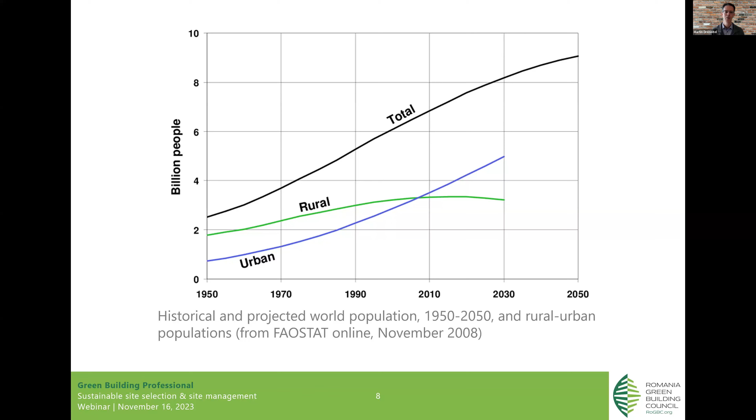Why is this so important for us, for the world? No secret, the number of people on the face of the earth is growing, and it's constantly growing. The rate of growth slowed down a little bit over the last years, or will slow down a little bit more, that's the forecast. So that's why the curve starting with 2030, 2050 starts to flatten a little bit. But what is more important, and this is really the key element, more people will live or are going to live in cities. And the number of people living in the countryside is dramatically going down. That puts a challenge in front of us that we have to deal with. No matter if you're an urban planner, an authority, an engineer, whatever, we have to think how we can address that more and more people are moving into cities. So here some figures: in the 1900s, you had around 2 out of 10 people living in an urban area. We already reached almost 6 people living in an urban area, and it will be even more in the future. So this is what we're facing, and this is why, one of the biggest whys, we have to think about brownfield redevelopment.

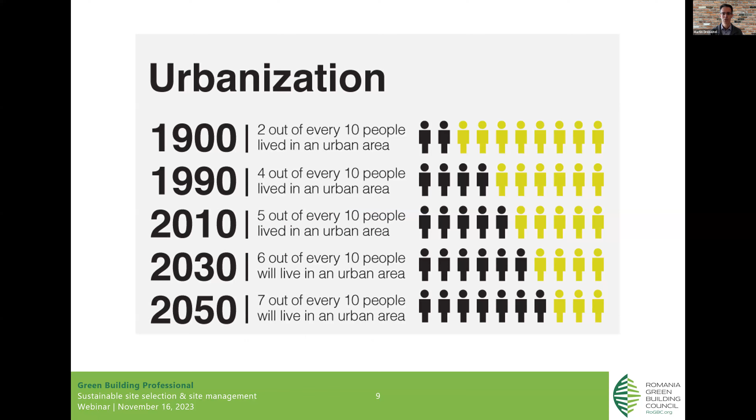I like math, I'm a big fan of figures, so I played a little bit around with figures to visualize what's going on here. Very simple information you can grab from the internet, you can do some research. So the surface of the Earth, biological productive land - I got this figure, the latest figure from 2019. So you see from the whole surface of the Earth, those 510 million square kilometers, around 122 million square kilometers are actually biologically productive. So the world population is already above 8 billion. I did not put here the latest accurate figure, I think 8 billion is sufficient for this calculation.

And then there is one figure which maybe I have to explain a little bit. It's called biocapacity, so that's the surface each of us requires to live. That includes what we need in order to survive - all we need to grow our food, just to live, for housing. This is what we need in order to exist. Every single person requires around 15,800 square meters. And if you compare that to our actual ecological footprint, that is around 27,700 square meters, you see that already right now we're using almost double the surface that is available to us.

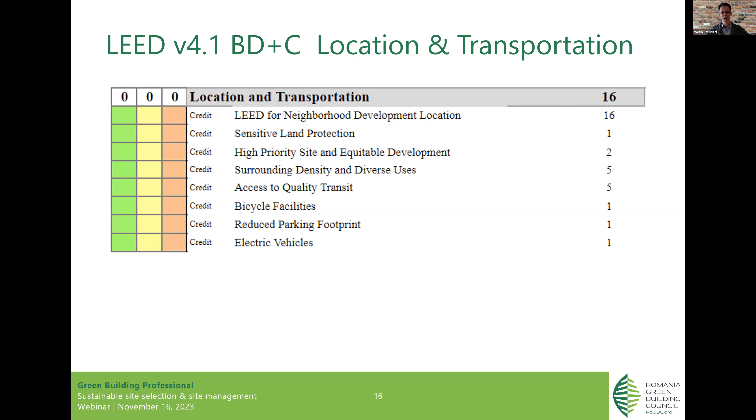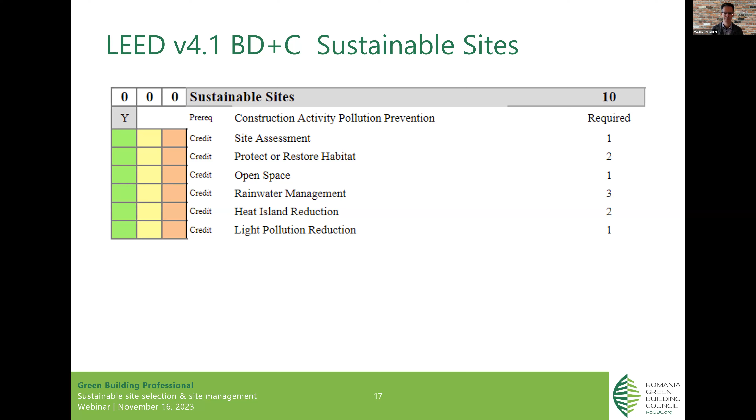Heat island, we will come to that. Light pollution, we will also come to that a little bit later. This one is more related to site management - it tells you how you shall design your project in order to receive those points. It's 10 points, it's a lot.

And we will have a little discussion, and I brought you some practical examples because I think pictures and practical examples explain better than a lot of words.

But what is important for you when you think about your projects is that you have to think about the life cycle of the project, the life cycle of the building. In the past, it was very common: I'm just building it. My focus is on whether it looks nice, and how I want to use it now. It should be an office building, that's it.

But that's not how it works, because when you look at urban development, even areas or whole cities change. They're like a living creature, so they're not the same all the time. An area in a city that might have been office in the past can change into housing. So if you made a building design for office and didn't think about that you might want to change it into housing later on, you have to do a lot of reworking of the whole structure.

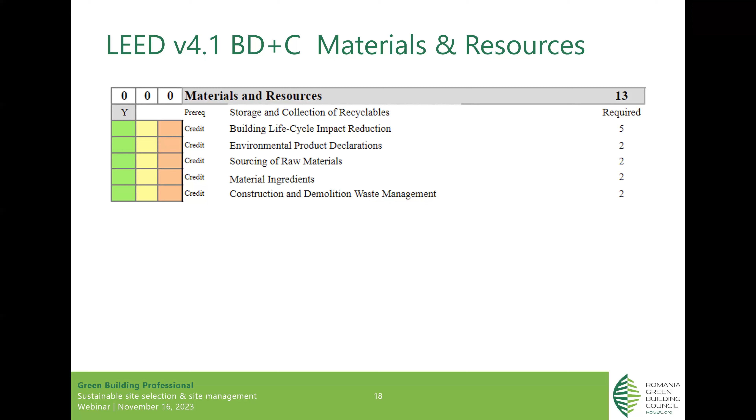So this is a very recent development, and I thought that's maybe interesting for those of you who are into financing projects. Finally, I'm so happy that it happened.

On the EU level, they issued a legislation that promotes a sustainable green approach, not so much from the technical side, but from the financial side. In June 2020, a legislation was issued on the EU level, which is called EU taxonomy. What is it all about? It's about a kind of certificate, really a certificate for green investments, for green projects.

And in order to qualify for such a certification, they introduced 6 targets, 6 objectives. You can read them: one is called climate change mitigation, the second is climate change adaptation, the third is sustainable use and protection of water and marine resources. Then transition to a circular economy, pollution prevention and control, and sixth, protection and restoration of biodiversity and ecosystems.

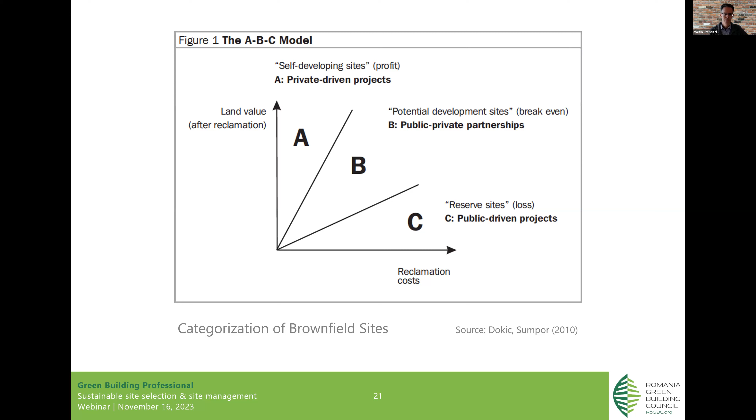Okay. Working. It's this one here.

Good. Now the two final slides on these chapters. Maybe at this point of the course you're asking yourself, yeah, okay, that sounds nice so far, why are not more people doing it? The next two slides are answering this question.

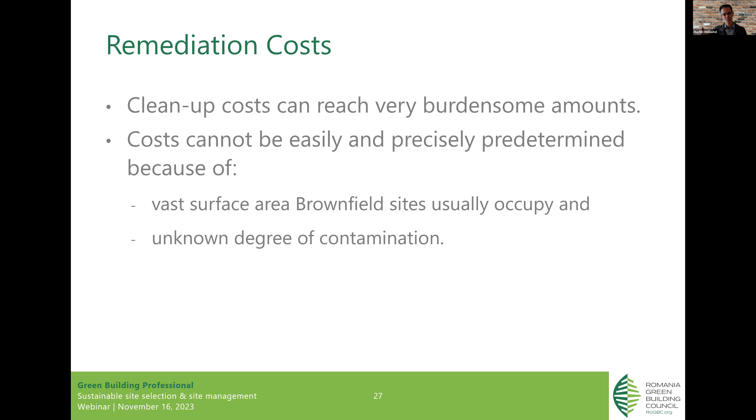The second important information for you is, remediation is not something that is only relevant for the land you are using for your project. It has an impact on the neighboring plots as well. In most of the cases I worked on in my career, if there is contamination on one piece of land, there is usually also contamination on the neighboring plots. And you are responsible also for this piece, because if this is your land and the contamination came from your land, it's not the neighbor's problem, it's your problem. So you also have to understand, where did it start and where did it go?

Maybe it started there and came to you. That's the best thing that can happen to you, because then your neighbor is the responsible one. So we need to understand where did it start, where did it go, how big it is, how deep it is. Then we can decide how we treat it and how we move forward.

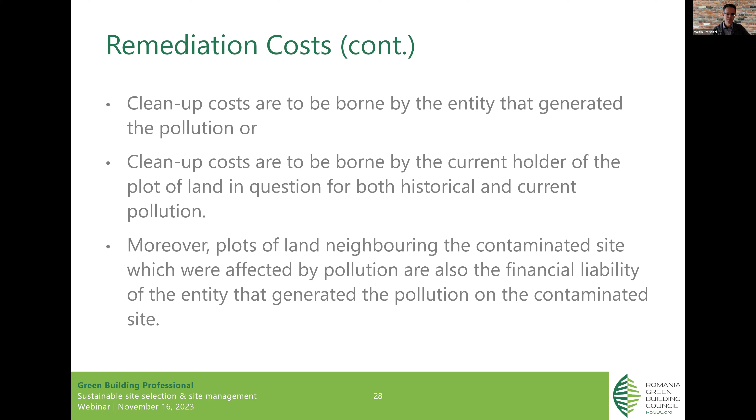We already had that piece. As an authority, as a government, you have to really think, how can you make it attractive for people to do brownfield development? You have to give them something, and then you get something back. What do you get back? If you have, let's assume, a contaminated site in the middle of the city, an old factory, already closed, bankrupt, nobody wants to use it because there are so many problems. I don't want to touch that piece of land.

For you as a city, this is an unutilized land. It might have a health impact on the city, on the people living around the area. You're not receiving taxes on that piece of land because it's not used. So there is a lot of incentive for the city, for the authorities, to promote the treatment and reuse of the land. If this land is brought back to life, you have again profit, tax on profit, profit taxes on salaries if people are working there. You increase the land value of this piece of land and of the surrounding land. You bring back business to the location. So there are a lot of benefits that at first glance are maybe not visible.

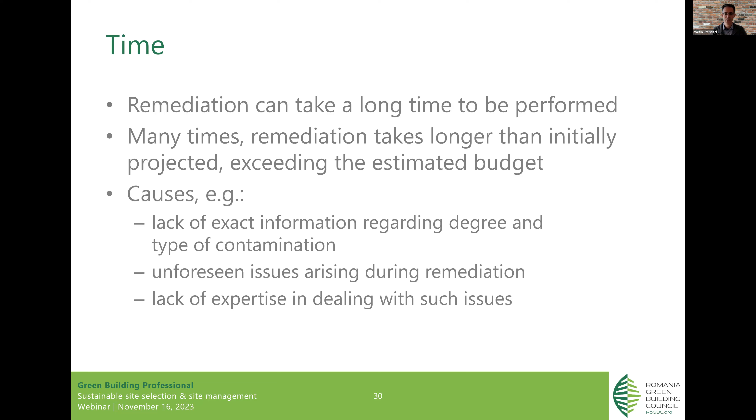Remediation can take long, and it requires proper experts in order to take the right decision for you. I want to skip that here a little bit faster because we will come to that again. And what can, for example, the authorities do to speed up the process?

There is something that has been introduced in the United States, which is called fast-track permitting. No offense, please don't take it personally against Romania or any other Eastern European country. I worked a lot in that region, and what I learned is the processes are pretty time-consuming and bureaucratic, and it takes a long time until you get a permit for a project.

Many of those steps are, I wouldn't say unnecessary, but repeating and take longer than needed. So if you as an authority want to help a project owner, help him. If he's working on a brownfield, say, okay, if you do brownfield, I'm helping you. I'm giving you the most efficient permitting process possible. I will help you as much as possible. I will prioritize your project in order to implement it faster and improve the situation faster.

So there are ways authorities can help. And there is also an interesting project where I participated, between Germany and Romania. The Romanian authorities did not have enough experience on remediation, so they invited German government or authority representatives to come to Romania and teach them and train them how they are doing things back home. And that really helped them to understand, okay, now it makes sense, I can do that. So that was a cool project.

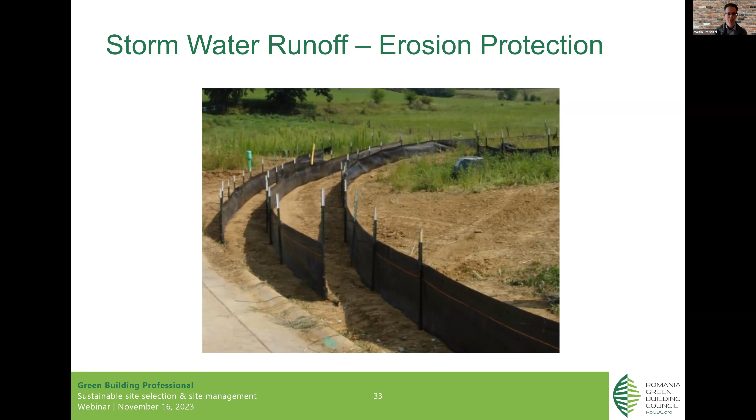And a little advice from many years of practice: do a baseline assessment. Check how the situation looks like before, do some measurements, do some monitoring, and continue the monitoring throughout the project until the end, so that you have really proof that it was not you who caused certain problems. A very classical example is that people come and say, because of the vibration, I have a crack in my house, or some glasses fell off the shelf, and you have to pay for it. No, it was not me. It was there before, and learn how to hold the glass. So you have to keep that aspect in mind. Baseline assessment, monitoring, and then you usually don't have problems during execution.

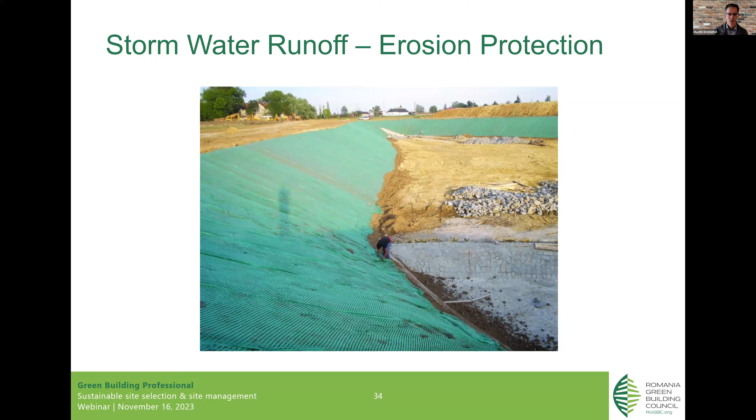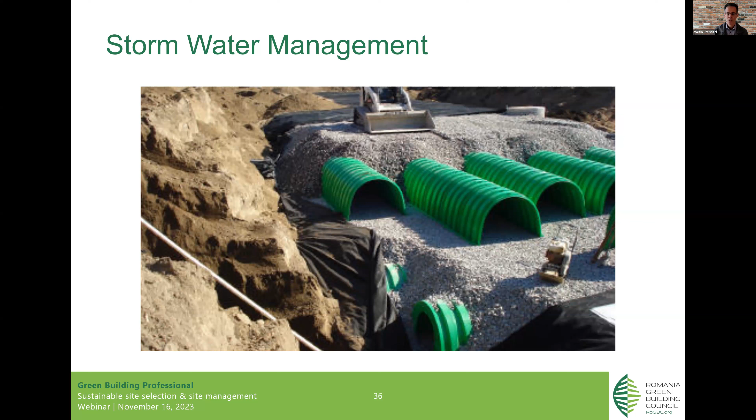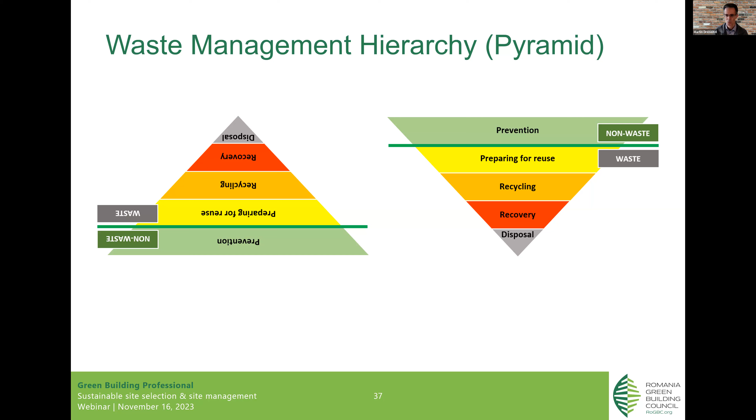Please discuss this with somebody experienced, because you will be surprised how much you can prevent and how much you can reuse on site before you go down into the orange, red, or gray area. But be patient for a second—once I show you the practical examples, this will make even more sense to you.

Another element that you saw in the certifications from LEED and BREEAM is alternative transportation. This is, again, why brownfield projects in urban areas are so interesting to us. Usually inside the city, you have a developed public transport system—there are buses, maybe trams, maybe a subway. You can use the bicycle more easily than if the factory where you're working is outside the city and you have to go on the highway, where it's maybe not a good idea to take the bicycle.

Inside the city, it's a lot easier to use electrical cars. You can provide charging stations. So those are all elements, although they don't have anything to do with the building.

That's why I'm saying you need to always see the big picture. It has to do with your project, it has to do with the community, it has to do with the city. A sustainable project is not an isolated construction of a building. It's a project that involves all stakeholders, and we have to go bigger.

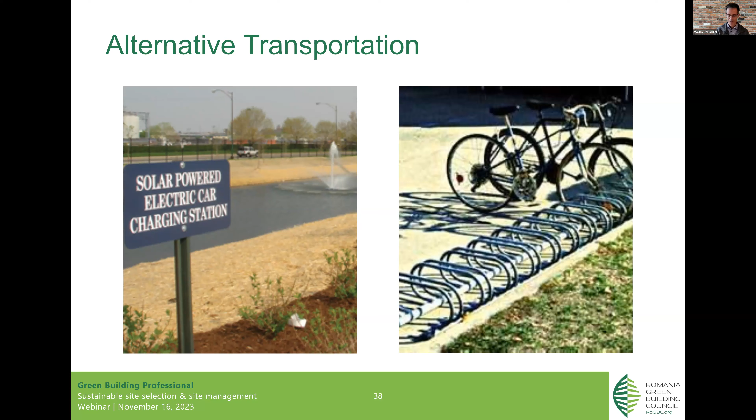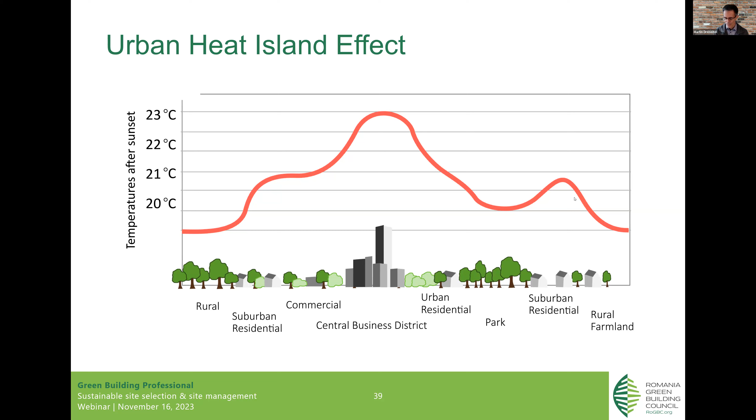Our job as project developers, architects, designers is to reduce the heat island effect. We have to take measures in our sustainable design that help reduce this phenomenon. How can we do that? We already had some cases: plant trees, put water surfaces, avoid asphalt, use concrete over asphalt, put green roofs, put green facades. All measures that reduce the temperature are welcome to fight the heat island effect.

Another element in certification in site management is light pollution. Whenever you can reduce it, do it, because it makes people feel good. Go on top of a mountain or in a very remote area, lay on the ground and look at the skies, and really enjoy that you can see the stars and the sky. Because you can't do that in a city, there is too much light pollution. You don't see the skies anymore, there's no stars visible.

More and more companies implemented, especially once energy prices increased, started to completely turn off lights in the buildings and even turn off their advertisements. So far nobody cared, and then everybody said, marketing, nice illumination of the building. So what? This costs so much money using the electricity, and it has such a negative impact on the surrounding people. You can't sleep anymore.

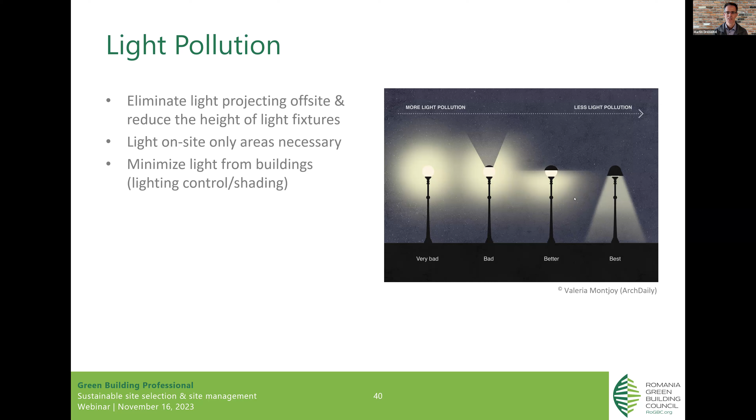And now we go into some practical projects. And here we have solutions - those are real projects that have been implemented. Those projects are all from the United States. Why? Because I had a partner, a company that partnered with us. The company was called Epstein. It's an architectural company from the United States.

They were active in Romania, and they helped us and the Romanian Green Building Council to develop the course. And when we developed the course, they contributed with some cool information and materials, and I kept them because it is hard to find so detailed information on European projects. So that's why, and it shows exactly what we are discussing about - that's why we have American examples.

So let's start with the first one. The project name is not so important. Where are we in the United States? We are in the Chicago area, and the site is around 5.4 hectares. Later on, they created a lot of jobs over there. They put a new facility, a commercial laundry later on.

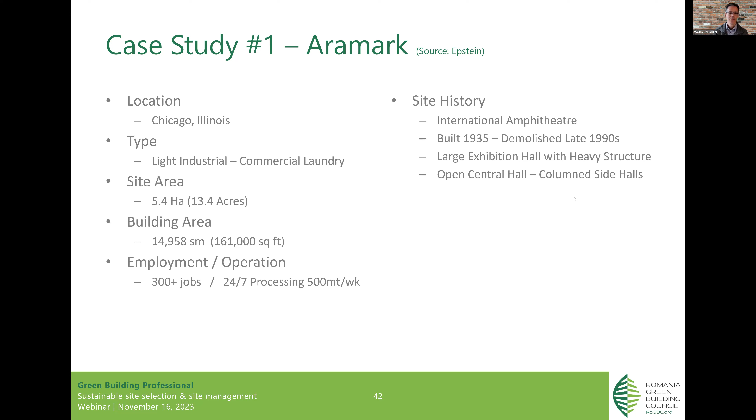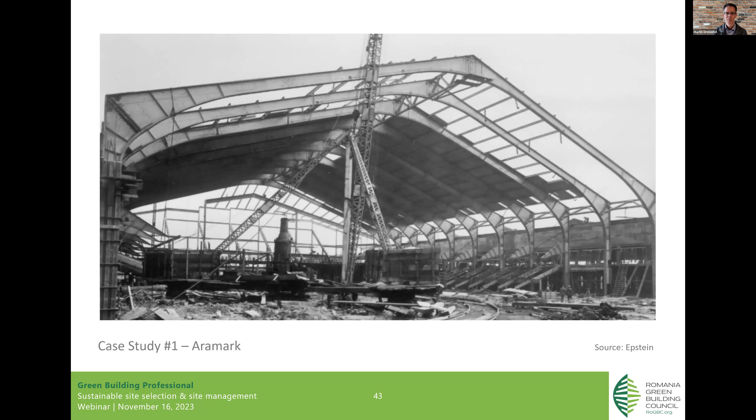And then those are those massive foundations that you had, under each of those metal elements, those beams. So we had the foundation.

So if we go now - let's think sustainable site development. Unfortunately, we can't have here a very lively discussion. I give you the story without asking you what would you do. I give you the classical story, and I give you the sustainable story.

The classical story is that, of course, everybody would have taken down - or this is taken down. The concrete here is removed. The foundations are excavated and removed. So that's the classical approach, meaning we eliminate all the problems that we have on site.

What is the result? We have a lot of excavation. We have a lot of transportation. We're moving the material to other locations. Okay, maybe some of the materials can be recycled, can be reused somewhere else, but also there is a lot that goes into a landfill. So overall, increased transport, increased crushing, increased landfilling - definitely not sustainable.

Now we come to the clever approach, and here it's about working together.

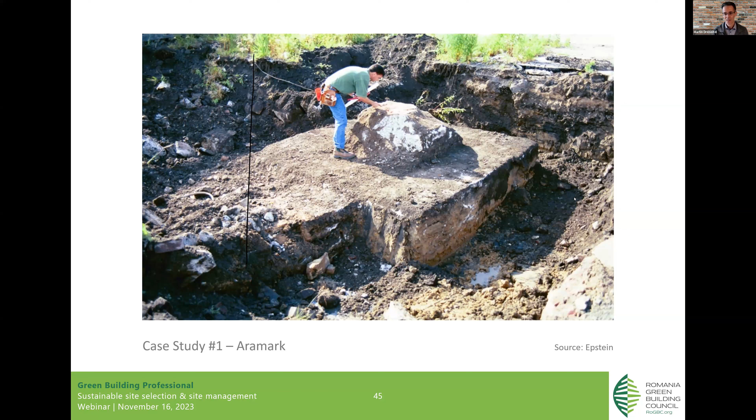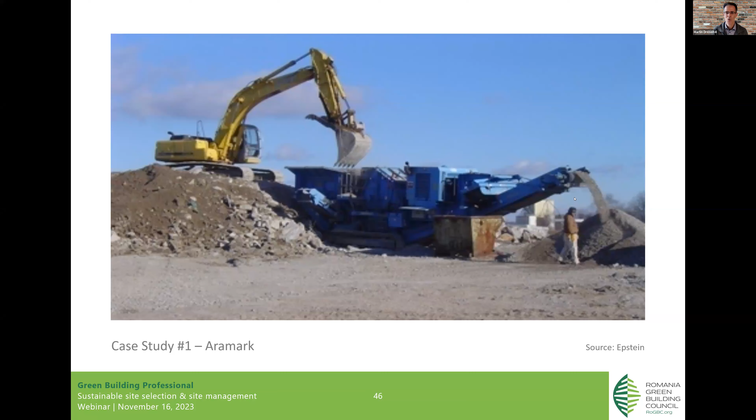So what they did finally, there was a lot of crushing involved from the paved area, but the material was not transported away. It stayed on site and became the base layer of the parking. And then on the freed parking area, they built the new facility. That's the whole secret of this project.

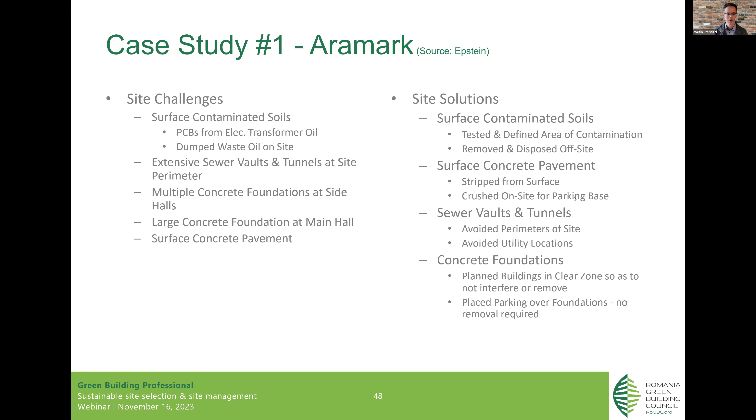The next example is, again, United States, but we're not in the north, we're not in the south, we're in the Missouri area, so the state of Missouri. The city is called St. Joseph, maybe that rings a bell in which direction we are going here. The state of Missouri has the name from the river Missouri.

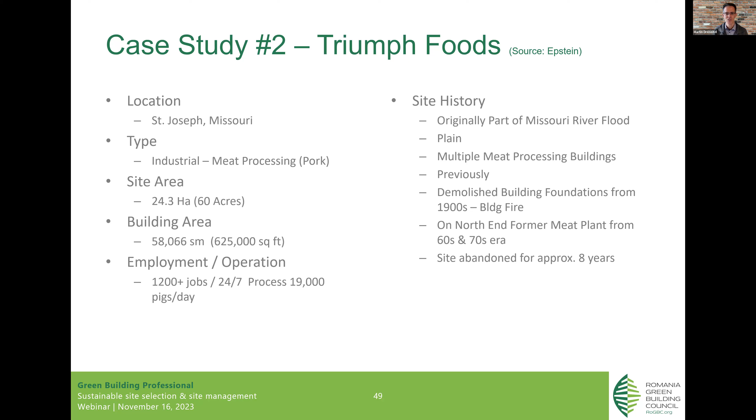The river Missouri is like most rivers that are naturally flowing. They have floods, and the material from the riverbed is distributed over the area as sediments, and you have a very high groundwater level, and the fine sediments are not very ideal for construction. So this is the history of the site. There is a picture that shows a little bit of the footprint of the site.

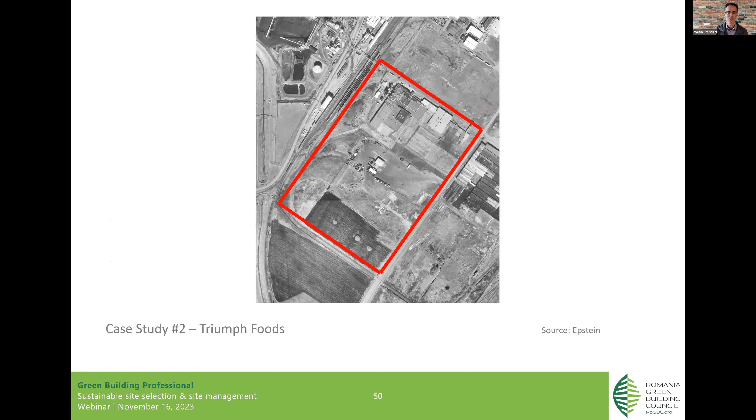So any structural engineer would say, well, high groundwater, fine, it's kind of clay material, the plasticity is very high. It's not very stable, it's kind of difficult to build on.

And in many projects, a decision would have been made. Let's take the example, not sustainable: we'll say okay, we cannot use the site, high groundwater, the soil is bad, let's go somewhere else and build somewhere else.

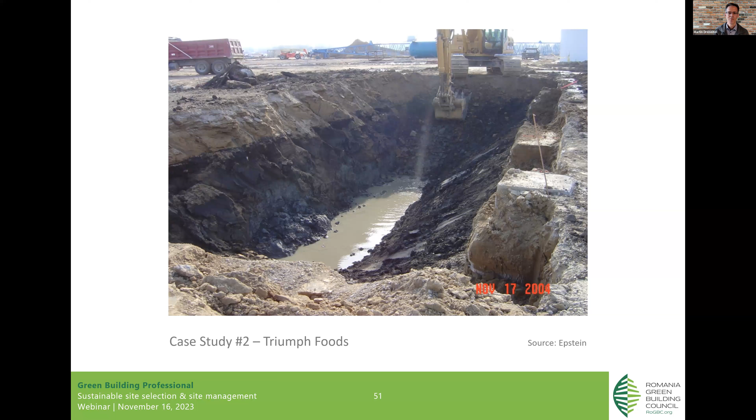And then you see some foundations here on site, on the side here, so there's a lot of foundations also. And yeah, what is the solution? Let's start with the foundations. Again, discussion between architect, environmental engineer, structural engineer, project owner.

The foundations on site, well, we don't have a problem with that. We are not building a basement, we are building a facility on surface, so we don't need to go deep into the ground. So we started using the foundations, and where necessary, we cut the foundations to go through with pipes. The rest of the foundations remained in place. So that was the solution for the foundation.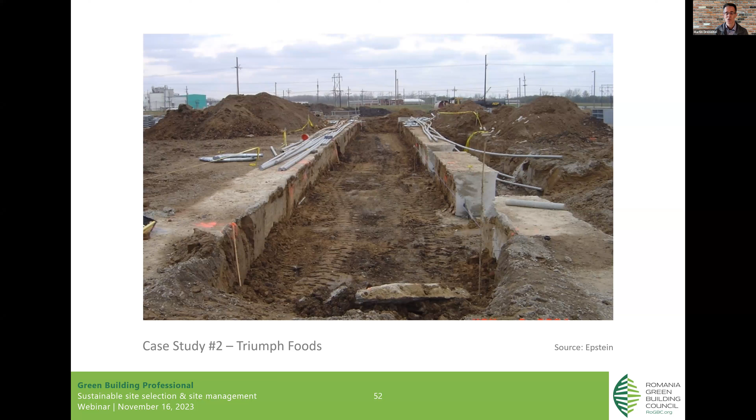Not generate - we are again at the waste pyramid. Remember, we are on top, not generating waste, avoiding waste. That's the highest priority: reducing transportation, reducing disposal, reducing emissions from transportation, reducing dust, reducing noise. These are all sustainable elements that will give you points for certifications, but we're not doing this for points only, but really to have a positive impact on the environment, because we are not putting the material into a landfill.

But coming back to the soil - this is a little bit difficult maybe to describe, but we will manage it together. What you see here, I hope it's big enough on your screen, looks like a grid. It is a grid, it's so-called a geogrid, and it's made out of polypropylene. So what you have here - sorry if I use my hands - you have two layers of polypropylene fibers that are welded together so that it ends up in a grid.

It's really, really strong. And what they did then is put the layers like in a hamburger - several layers: a layer of soil, a grid, another layer of soil, a grid, another layer of soil, a grid. And what you see here is, ultimately, like you use steel for reinforcement in concrete, you use this grid as reinforcement in soil.

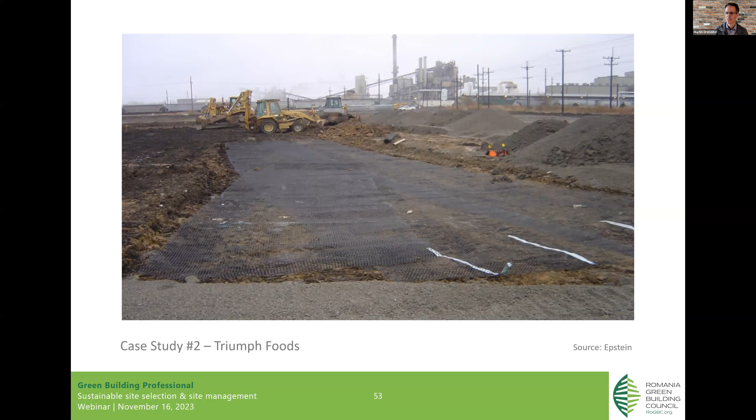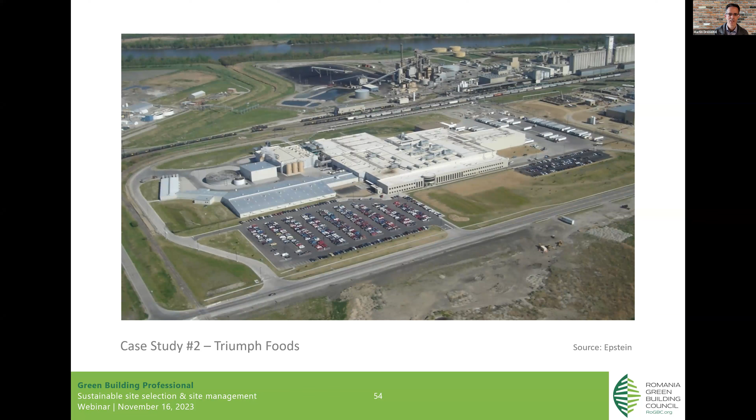And finally, this is how it looked like at the end. In the back, you see the Missouri River. So finally, they managed to implement this project in a sustainable way using this old site. Here we had some crushing, some reusing - the foundations remained in place. This is something you will face in many different areas and projects.

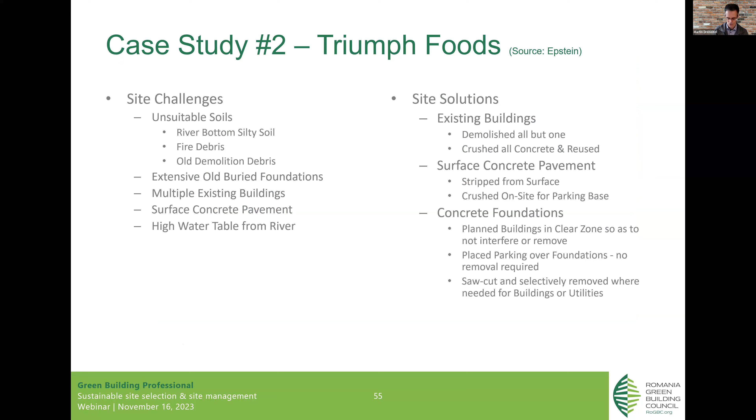So next one, we are back to Chicago. The reason why, again, Chicago - Epstein has their headquarters in Chicago, that's why we have so many projects from Chicago. This is an interesting project because they got a LEED Platinum certification, the highest certification you can get under LEED. Here it's important to mention there was some incentive from the city for redevelopment, and also a shorter permitting process because it was a LEED project.

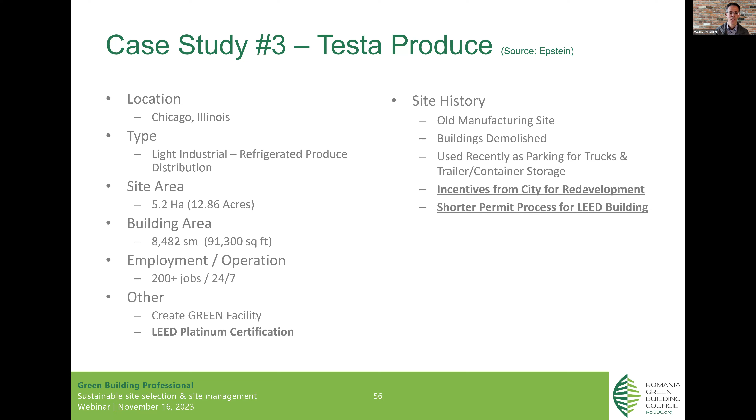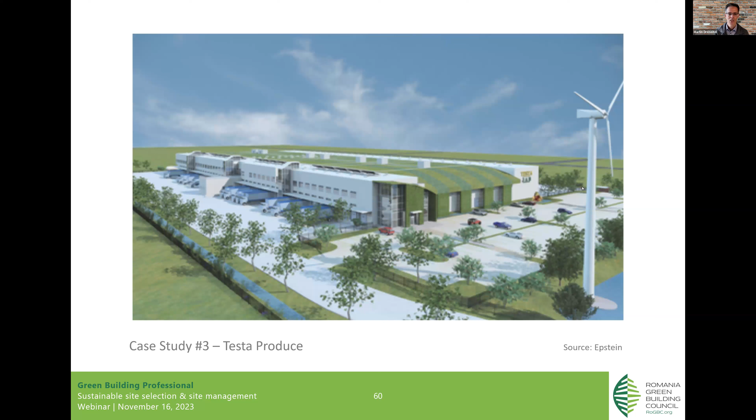And this is now the real world. So they put the wind turbine over there. They built the green roof. They built the solar panels. They had electrical charging. So there is many things you can do.

And the contamination solution, I can't show you on the picture, but I will show you later when we come to the remediation part, what they did over there. I can tell you what they did. They had a contamination on site, and the contamination stayed on site. It was not removed. That might sound, without explanation, a little bit strange, but you will understand very soon why it was actually a very clever approach.

So the next message I'm giving to you before we move to the remediation topic is: because we have a contamination does not mean we have to spend money on remediation. Those are two different topics.

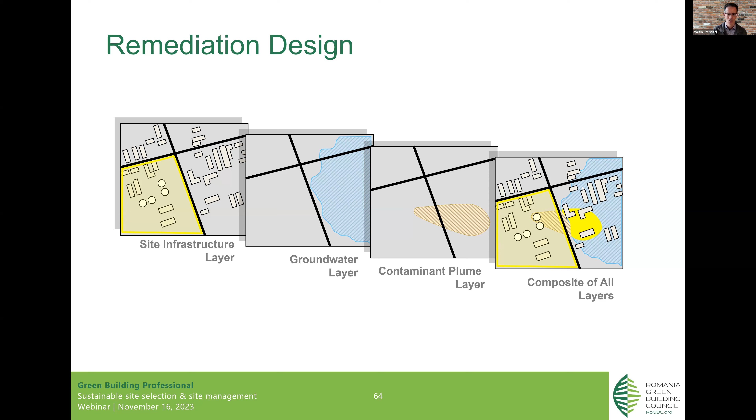And this is what you should remember, because this is the key, the trick to sustainable site development. You have to understand the source pathway receptor model. What does it say? I always have a source, which is my problem, which is my contamination. In our case, it is there because we have a problem, we have a brownfield.

There is a receptor, which is us. We cannot make the receptor go away because we want to build something there. And what is remaining is the pathway. The concept is very simple: where those three overlap, let me call it different - if the three overlap, we have a risk. If you remove one of them, if there is no source, no risk. If there is no receptor, no risk. If there is no pathway, no risk. Only if all three come together and overlap, then we have a risk.

This is the basic principle you have to understand. So by eliminating one of those three - as we said, the source - we can eliminate the source and excavate it and remove it. That would be a solution, but it's not a sustainable solution. We cannot remove the receptor because we want to do a development. But what we can do is work on the pathway, for example.

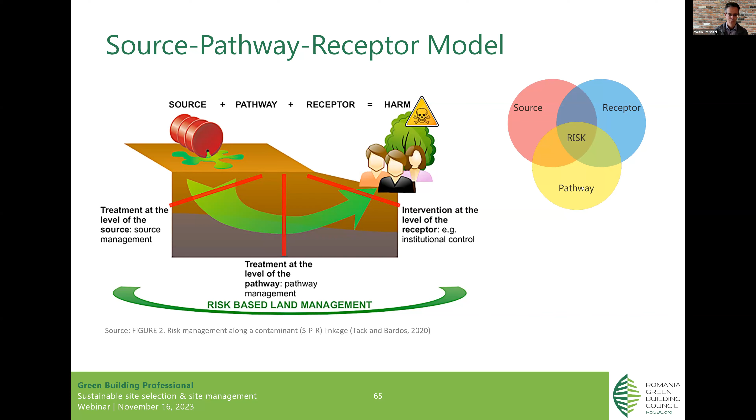There are several pathways. This is also what I want to show you. You have either the direct contact - so let's assume there is this contamination in the soil, there could be direct contact, we touch it. So if you want to build a children's playground there, not possible, because they would touch the soil. If you put a barrier in between and fresh soil on top, theoretically, yes, it's possible.

There is another problem if the contamination goes into the water. This is what you see here on the picture, the contamination moves into the water. And then from the water, from the groundwater, maybe into a lake or a sea. Or if we then take water from the groundwater as drinking water, there is an indirect contact to the contamination - first in the soil, then in the groundwater, and then to me when I drink it.

So what we're talking about - and there is also theoretically another pathway, through the air. So there are some contaminations, you see this here, from the contamination in the soil, vapors migrate through the soil into my house. So this is gas migration. This is also a pathway, through the air. And this is what we have to analyze.

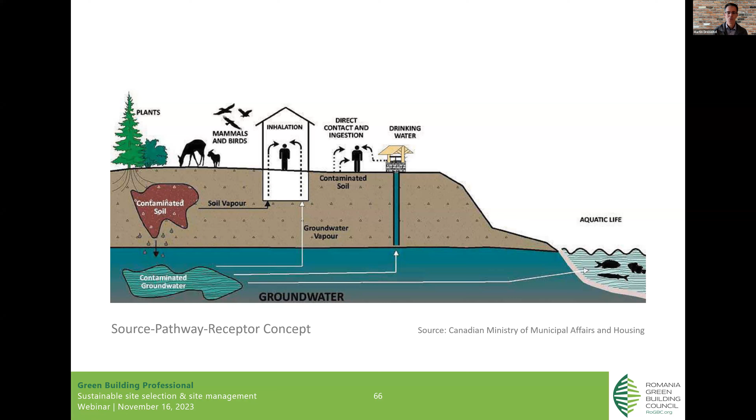And how do we analyze it? We make a risk assessment. I'll skip that slide because it's not so important for you to read. This is what at the end of the day is important: what we assess is how likely is it to happen, and if it happens, what are the consequences?

Let me give you an example that is maybe closer to us than a contaminated site: a flood, a river. The water level in a river changes depending on the rainfall, depending on the season. And a river basin has a certain shape with a certain volume. So if the water level is above that, it starts to flood the area. That's why alongside rivers there is a so-called protection area where you're not allowed to build. If you build there, you would be flooded more often, or the consequence would be more severe. That's why big construction is only allowed further away, so that the likelihood of being flooded is lower and the consequence is minor.

You understand the concept? Sometimes we cannot completely exclude the risk. There is a remaining risk. But if the flood happens every 100 years, maybe that's acceptable. If the flood happens every month, it's maybe not acceptable. So the difference here is, when we are developing brownfield, we always have this risk assessment, and we are deciding: is the consequence acceptable, or is the risk acceptable, or is it not acceptable? How often does it happen, and how severe is the problem?

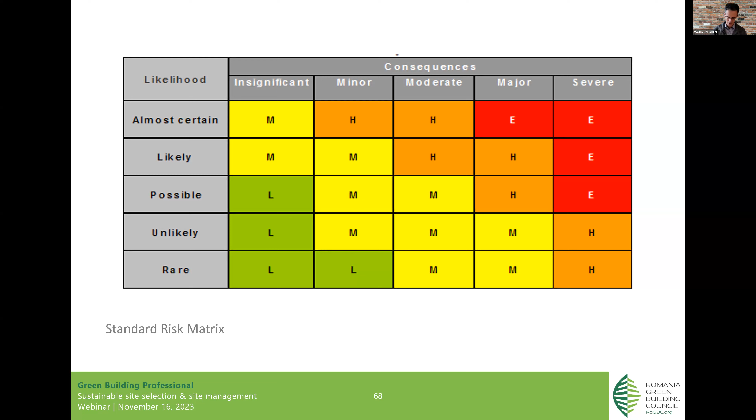Those you don't have to remember really, but they explain some of the examples I gave you. So I just want you to understand them briefly.

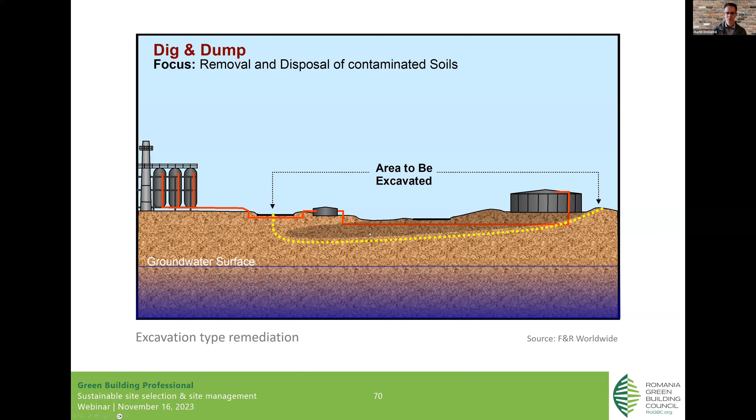So this is the non-sustainable way of doing it. You have an excavation, a polluted area in the soil - as you can see here, it's not going into the groundwater, it's above the groundwater. What you do is replace the contamination with clean soil. Very simple, very fast depending on the size, but usually fast compared to other technologies. It's called dig and dump. That's the classical historical approach to solving problems. It's not the most sustainable one.

In some cases it's still important to use, because if there is a risk that the pollution can go into the groundwater - if it's very mobile and could be transported - then we might have to remove the contamination. In that example from the United States with arsenic, chromium, and lead, it could stay in the ground because heavy metals are very stable compounds. You cannot leach them; they are very, very stable. So there was no risk of groundwater pollution, and they said, okay, let's keep them in the soil and cover them up.

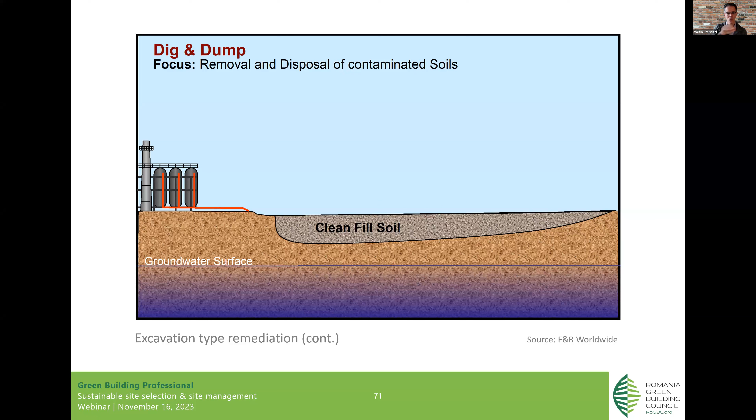So this is where you have the pollution, and on top you put a cap. This avoids rainwater from going into the contamination.

Now let's combine our thinking from before. Even asphalt or concrete can be impermeable. So if I have a contamination, I can theoretically either build a parking lot on top of it, or I can even build a building on top of it. So putting the building or the parking lot on the contamination is already a remediation solution. Now you see how all these things fall together.

This is why it's so important that you do the investigation first, understand your problems, and then decide with the architect: over there I have the pollution, do you mind if we swap the design and put the building or the parking lot over there to cover up the pollution? This is why all those disciplines have to work together to make it a sustainable project.

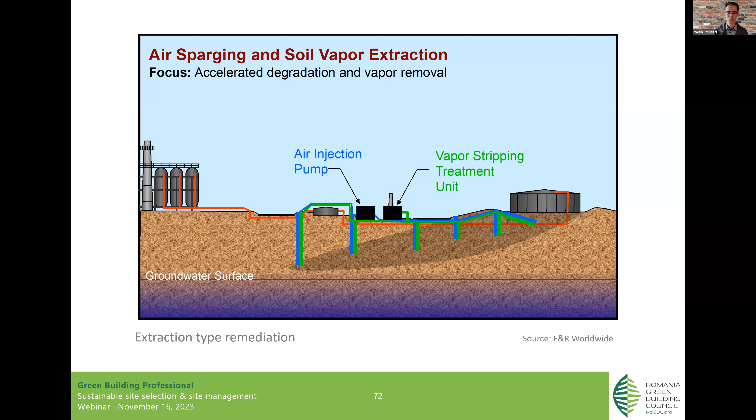This is a technology for when the contamination is in or on the groundwater. So this is also possible—even if you have contamination in the water, you can remove it.

Those technologies usually take more time. It's very important here as a project developer to understand how this impacts my development plans time-wise—where can I already build, and where can I not build because I need to work on the remediation?

Again, this project in Bucharest is a good example. What I need for this is, as you can see here, the green thing is a well—a groundwater well where I extract the pollution. And then somewhere I need a facility where I can treat the pollution. So on site I need a place for the treatment facility, and on site I need those places where I can extract the pollution from the ground.

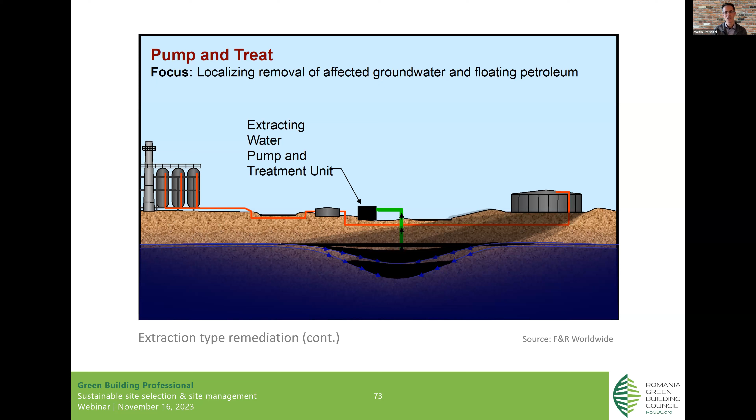With an experienced environmental engineer, you can even do your construction and development in parallel. It's again a matter of communication. We had cases where we did extraction in the basement of an existing building. So it is possible—it just requires discussion, communication, finding solutions together.

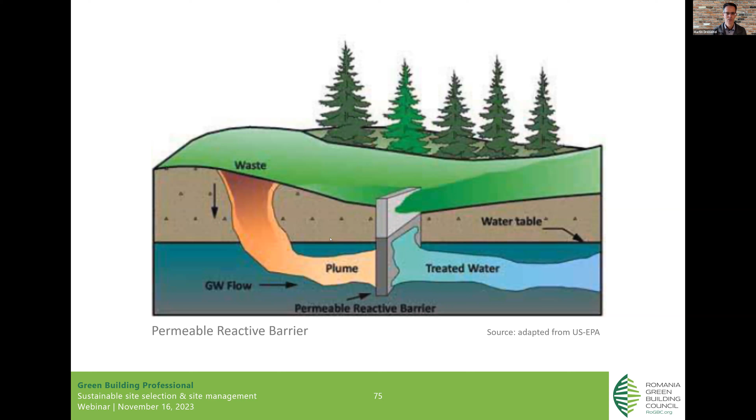Like the parents at the school—they were only willing to send the children there because they were involved in the process. They felt comfortable. If you confront them at the end instead, you might have a kindergarten and a school and nobody sending their children over there because they're all scared. That would have been the negative way of doing it.

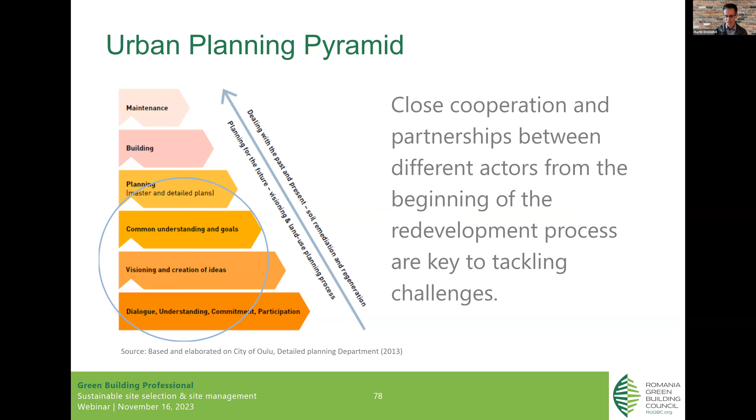What you see here in this half pyramid is that at the bottom is always this communication, dialogue, understanding—so important together to create a vision and ideas and define how we do it together. The planning, the building, the maintenance—the public is not so much involved in that anymore. But at the beginning, it's all about transparency, transparency, transparency. Then your project can be super successful. That's the message you should take with you.

Everybody knows about public-private partnership. And this is when it turns into a 4P project. It's actually public-private-people partnership. It's not so much about just the public and a private investor.

Because that's the one that leads usually to success. Of course it's not a guarantee, but the likelihood is so much bigger than doing it secretly and then confronting people at the end, because then they always think, oh, you want to hide something from me, I don't trust you, you didn't tell me from the beginning.

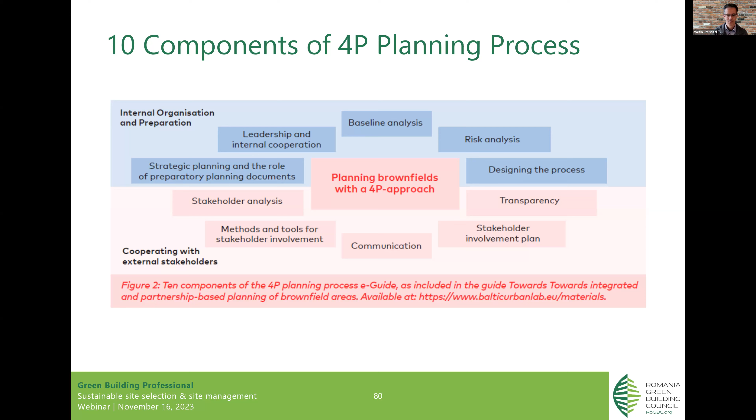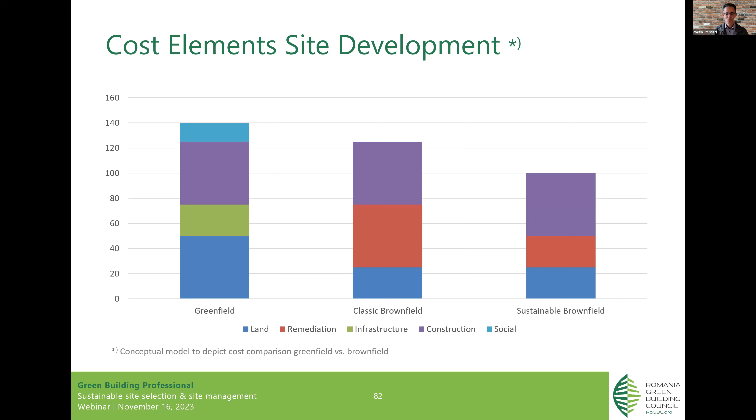Not just, yeah, the building is cheaper here because I don't have to do remediation. Maybe you don't have to do remediation, but in a brownfield maybe I also don't have to do remediation, but I improve the environmental situation on the site a lot. So this is one of the main messages I want to give you.

The second part is, as you can see here, investigation, investigation, investigation. This is what it is all about. That's the key to success.

You take the time for the design, think out of the box, talk to somebody who is experienced, and use what you have. Don't consider everything a problem - consider it also as an opportunity that you can use to your advantage. Just be creative, be creative.

I hope I could give you some ideas, a spark that could start a fire or create a snowball effect, if you like that one better. I personally believe and experience that this is the right way to go. This is definitely the sustainable way to go. It still requires a lot of convincing, training of people.